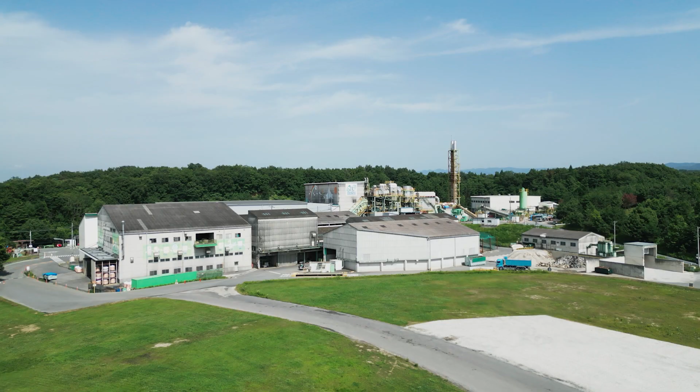In 1998, it obtained ISO 14001 to protect the abundant nature of its current location, Kuchiokawa Town, and to harmonize with the local community. We manage it in an eco-friendly manner based on strict self-management standards.

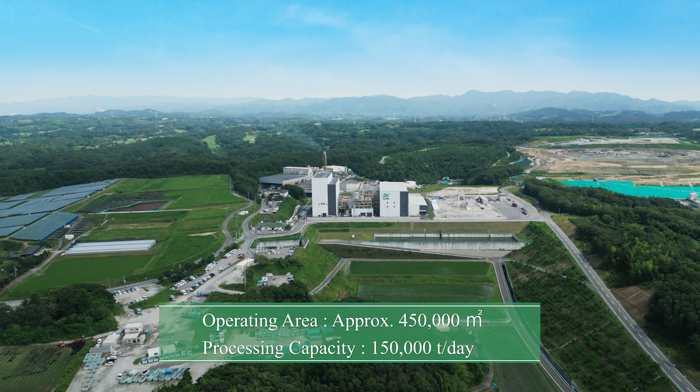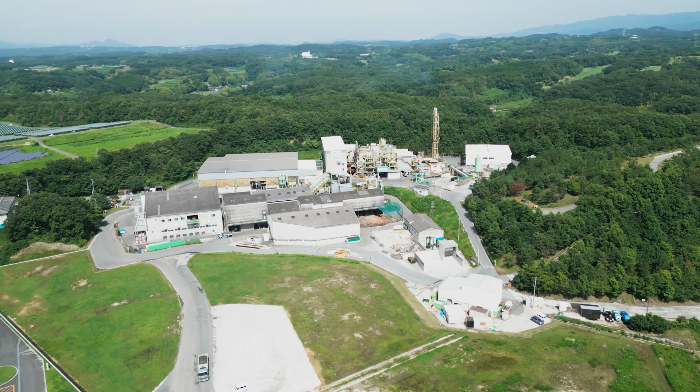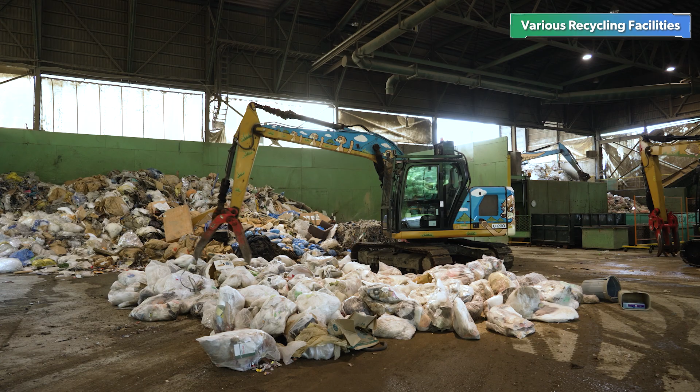This is a comprehensive recycle center with the facilities enabling one-stop operations for intermediate treatment, recycling, and final disposal of waste on a broad site. The transported waste is brought to each facility according to its property. At the crushing and sorting facility, we roughly sort the waste by heavy machinery and collect raw materials.

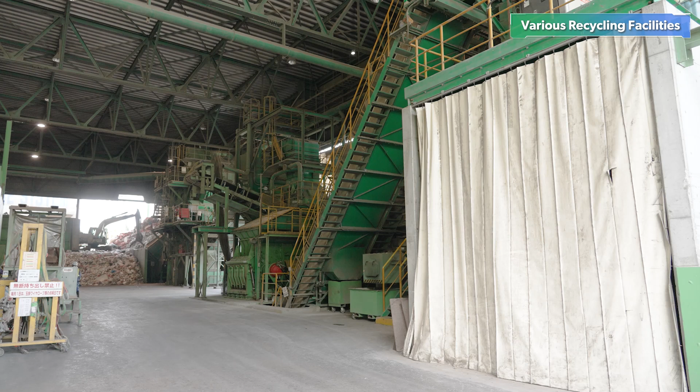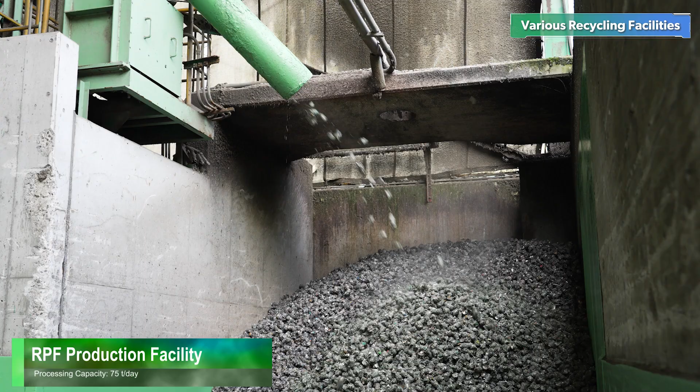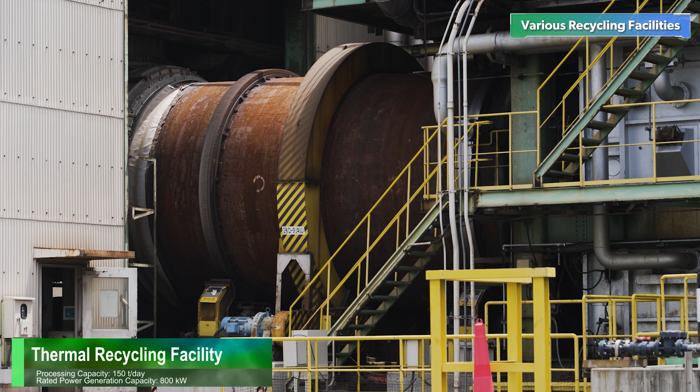Waste paper and plastics are sent to the RPF production facility to be processed into solid fuel RPF that can be used for boilers instead of petroleum or coal. The thermal recycling facility uses the thermal energy generated from waste incineration for power generation to supply electricity to each facility of the center.

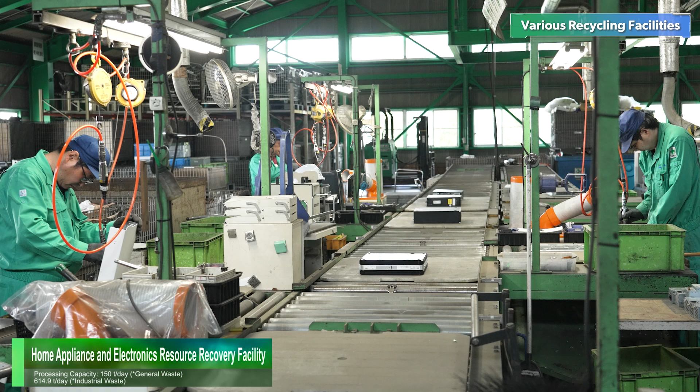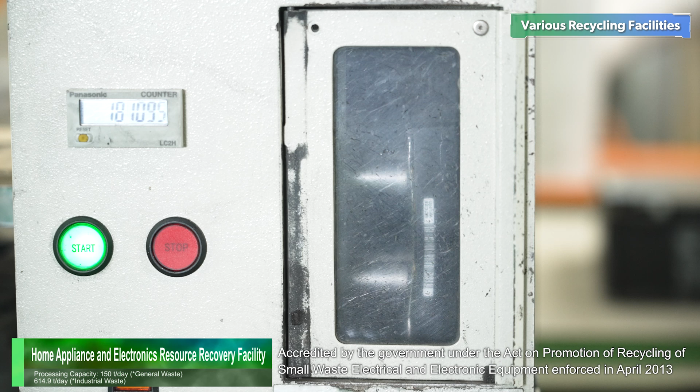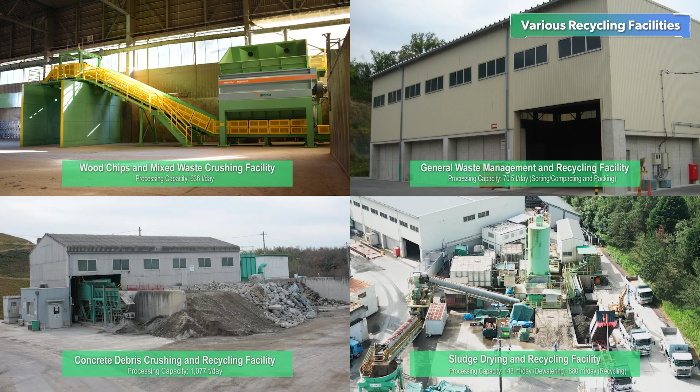We sort waste OA equipment and small home appliances at the Home Appliance and Electronics Resource Recovery Facility to collect rare metals. Accredited by the government, we are no longer required to obtain a business license for waste disposal, which allows us to contribute to the national resource policy through cross-regional recycling operations. The collection status of small home appliances is compiled into data and provided to municipalities. Moreover, the Miki Recycle Center addresses recycling and resource recycling in various ways.

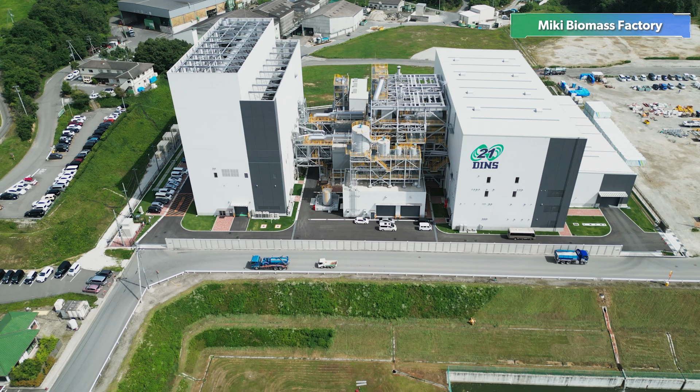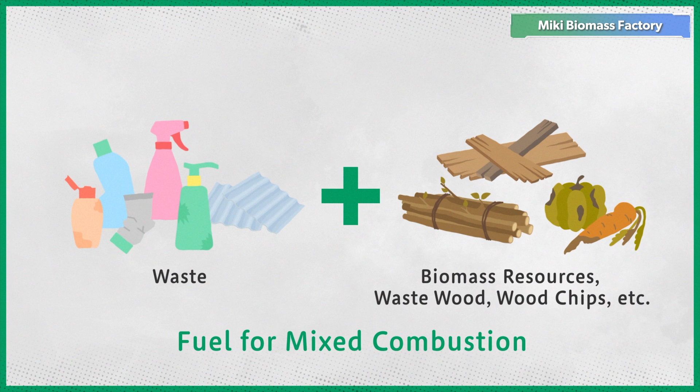In 2023, the Miki Biomass Factory began operations. The factory utilizes thermal energy generated by the mixed combustion of biomass resources with various waste from the local community for power generation. Waste and biomass resources are combusted in the stoker furnace. The thermal energy thus generated is effectively used not only to heat the boiler, but also to heat the water sent to the boiler and to further heat the steam from the boiler into the high temperature and pressure condition.

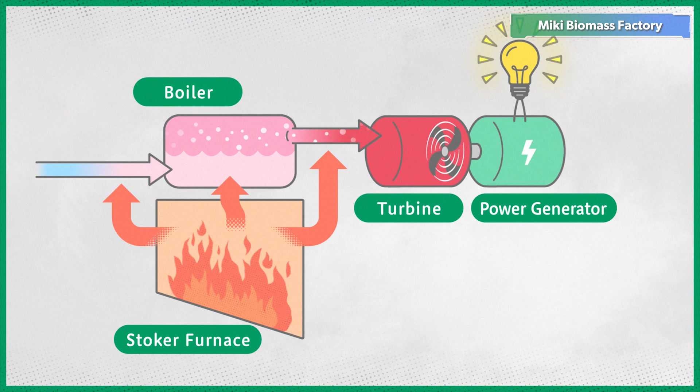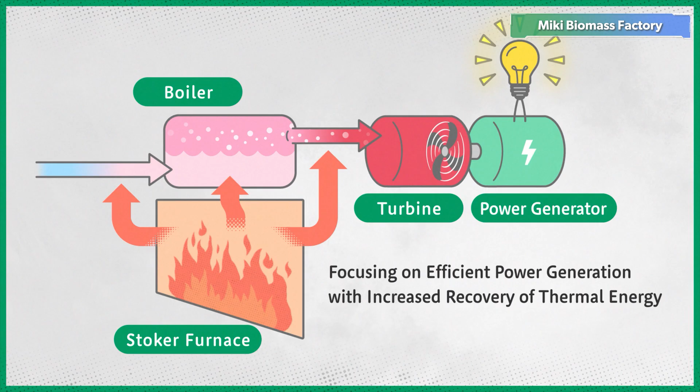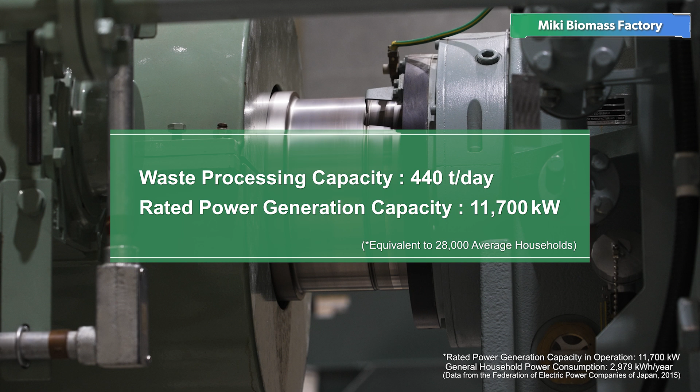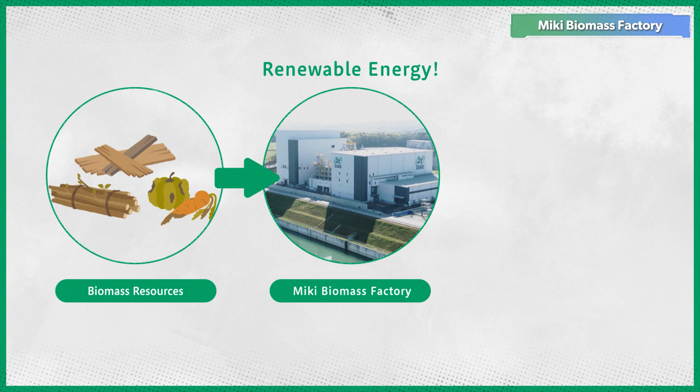The Miki Biomass Factory focuses on power generation efficiency by increasing the recovery rate of thermal energy, which is the greatest feature of this facility. The rated power generation capacity is 11,700 kilowatts for a daily waste processing capacity of 440 tons. It is equivalent to the consumption of 28,000 average households. The renewable energy thus generated is purchased under the FIT system, and its environmental value is bought back to contribute to the virtually zero CO2 emissions from the electricity at the Daiei Kankyo Group headquarters building.

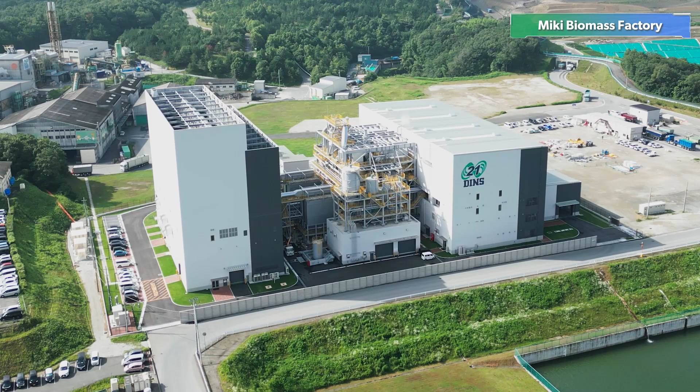The Miki Biomass Factory, as a power supplier also for each facility of the center, represents a major step toward our target to double the processing capacity of the heat treatment facilities. It also helps the reduction of greenhouse gas emissions from thermal power plants and final disposal sites.

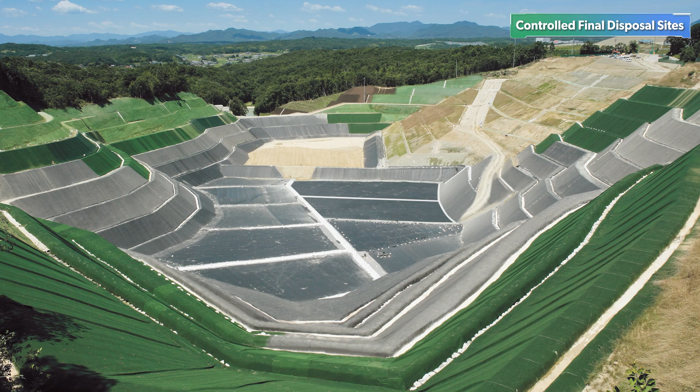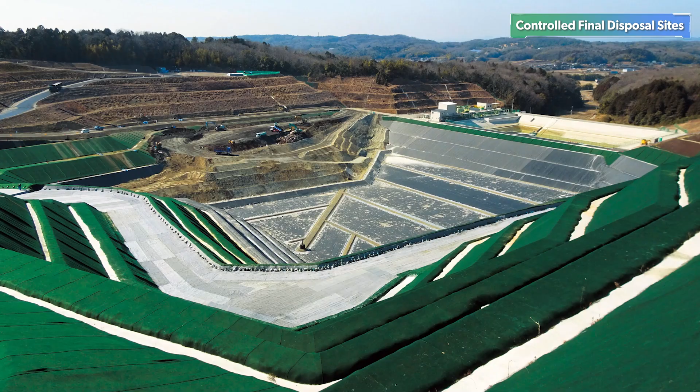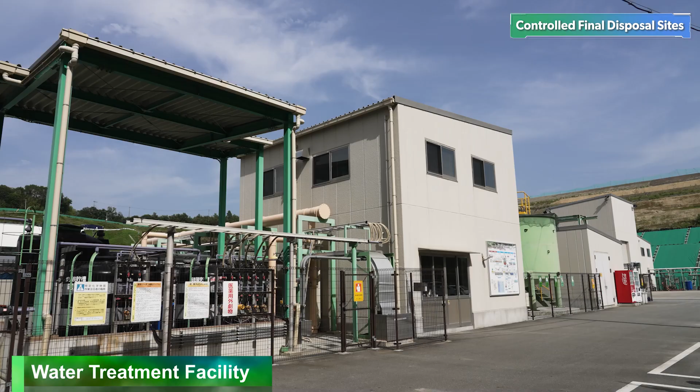Along with the establishment of these recycling systems, controlled final disposal sites where the residue generated from recycling and non-recyclable waste can be properly treated have been developed. In 2021, the Makitani No. 2 controlled final disposal site was expanded. Leachate from the final disposal site is discharged into the river after being purified by the water treatment facility under our stricter than legally required self-management system.

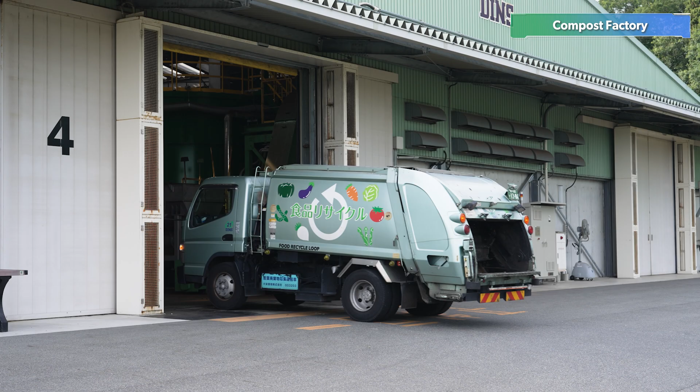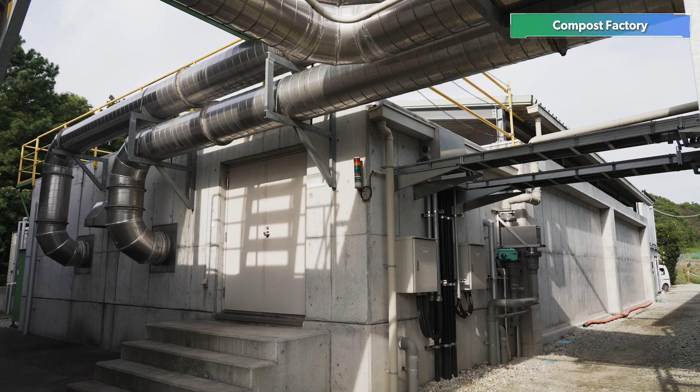In 2014, we launched the Compost Factory, a composting facility in cooperation with the Aeon Group. We produce high-quality compost, collecting food scraps from the Aeon Group stores. Odors generated during compost production are treated at a deodorizing facility. The compost is used at the adjacent Aeon Group farm, and the harvested products are sold again at the stores. This creates a food recycling loop.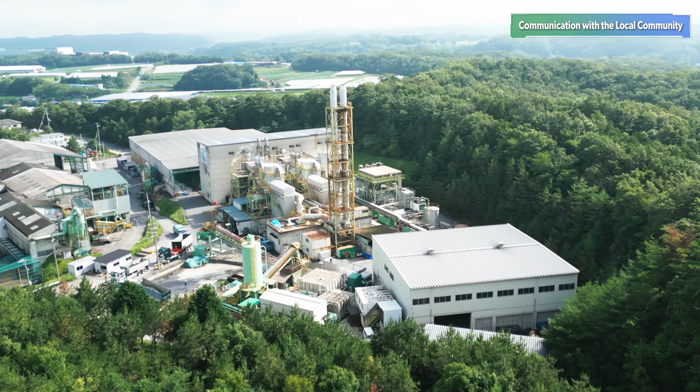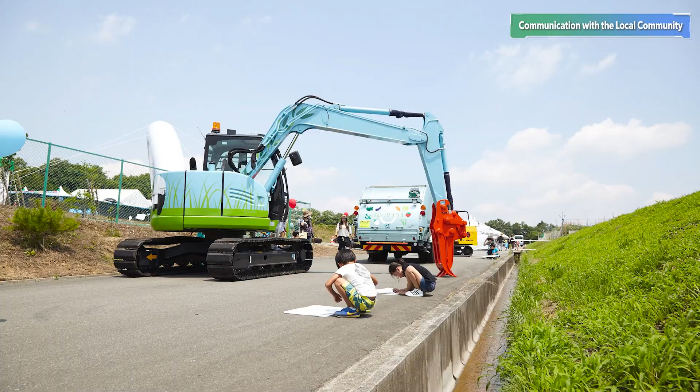As well as the preservation of the regional environment, the understanding and trust of everyone in the region is essential for the management of these facilities. As efforts in this regard, the Miki Environmental Festival has been held since 2015. Local residents, including many children, participate in this learning experience event for the development of their interest in and understanding of the environment and recycling every year.

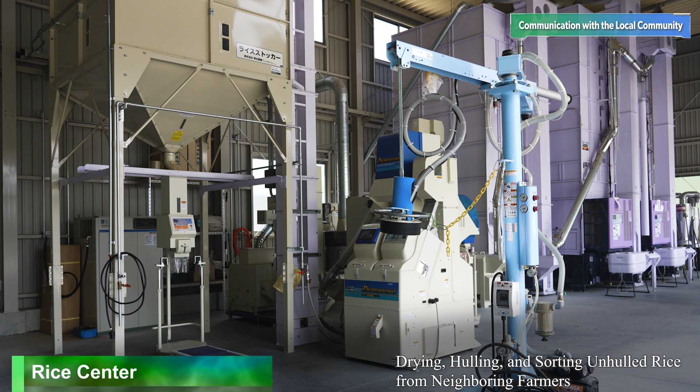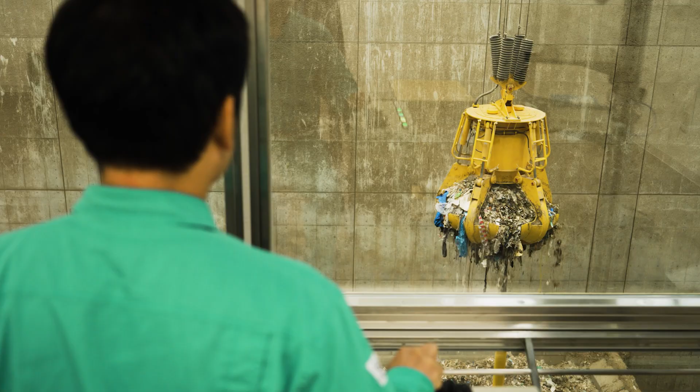We also established a relaxation facility, Ikoi no Shisetsu, and Maki no Sato Agricultural Producers Cooperative Corporation that promotes the utilization of idle farmland. And we manage a rice center that supports neighboring farmers in the sake rice fields in an effort for regional vitalization and bonding. The Miki Recycle Center of the Daiei Kankyo Group will continue to pursue a sustainable future together with everyone in the region, believing that the future comes from trust.